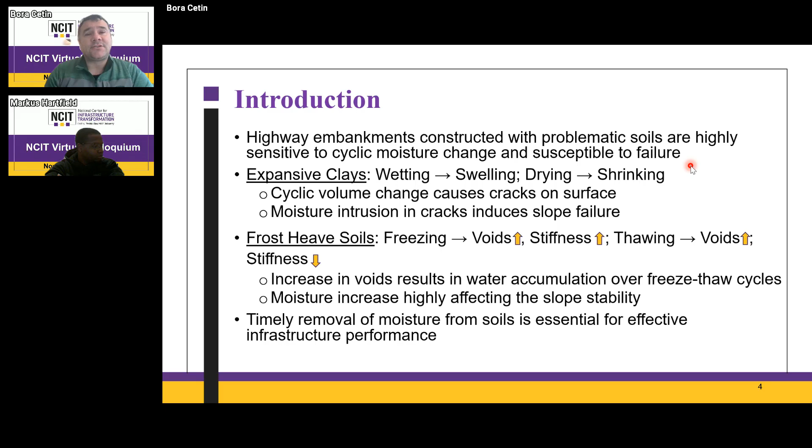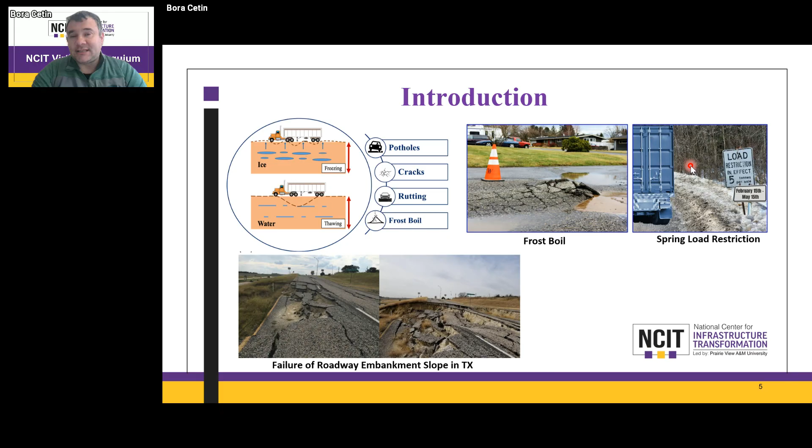The damage caused by these expansive soils and frost susceptible soils that are subjected to wetting and drying cycles and freezing and thawing cycles, the damage caused in terms of budget is 10 times higher than damage caused by hurricanes, flooding events, and even earthquakes. So these are not sudden, dramatic failures like we see in flooding events, earthquakes, hurricanes and storms, but annually the U.S. needs to deal with these two types of problems. So it's really a major problem.

What are the typical conditions for slope failures and highway embankment performance in general? You have problematic soils—two of them, as mentioned, are expansive soils and frost susceptible soils. And environmental conditions: in one case you have heavy rainfall, and in the other you have freezing and thawing cycles and water supply. Water supply is one of the major problems we deal with in geotechnical engineering. I always say if mankind ever settles or colonizes the Moon or Mars, you won't need many geotech engineers there, because there's not enough water to cause enough problematic soil issues.

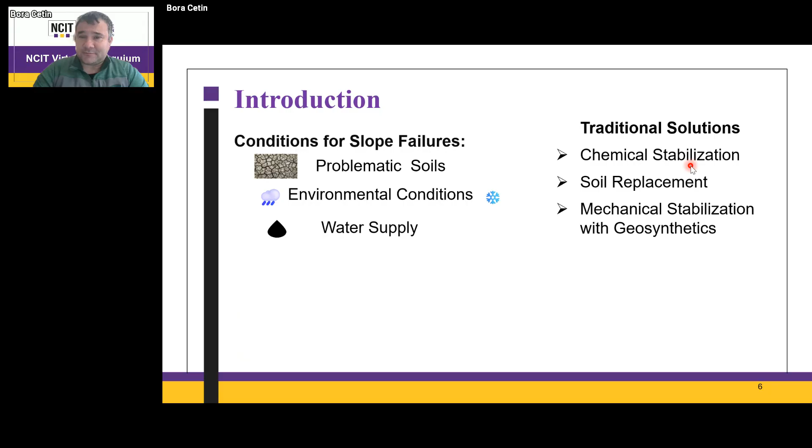The typical traditional solutions to handle these problems are chemical stabilization or replacement of soils, and mechanical stabilization, whether it's more compaction or drainage improvement, or putting standard regular geosynthetics.

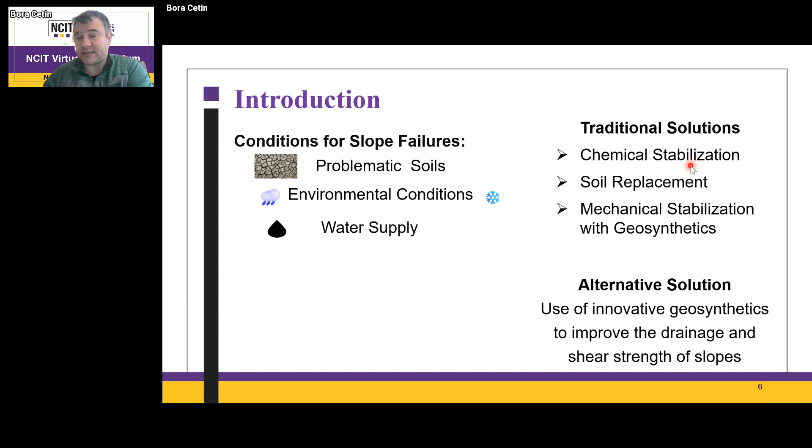However, those things have been studied, and since this is a new study, we wanted to come up with a little bit more alternative solutions, some innovative materials recently developed in the geosynthetic industry to improve the drainage of any geotechnical infrastructure, and when you improve the drainage, that would ultimately improve its mechanical properties.

One of these products, we have another product that we are testing, but I wanted to focus on the geotextile we call the wicking geotextile, which has wicking fabrics between the patterns there, as you can see the blue lines.

What these wicking fabrics do is use the differences between the relative humidities from the atmosphere and within the soil, to start moving and suck the moisture within the roadway system or soil system and remove it horizontally to the sides of the embankments or to the slopes, trying to keep the soil as dry as possible.

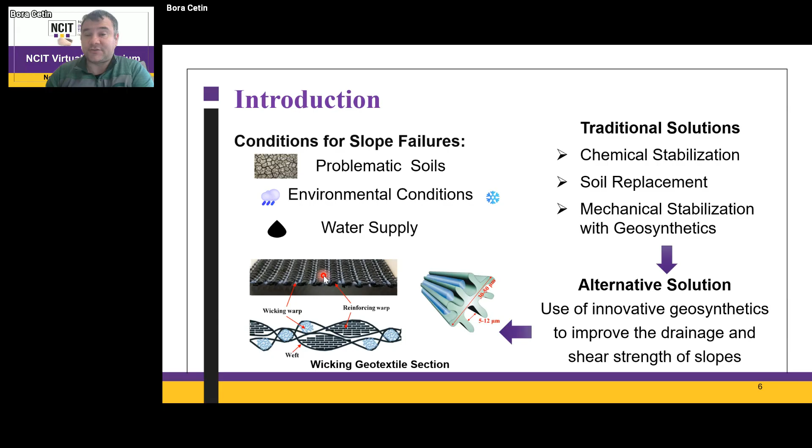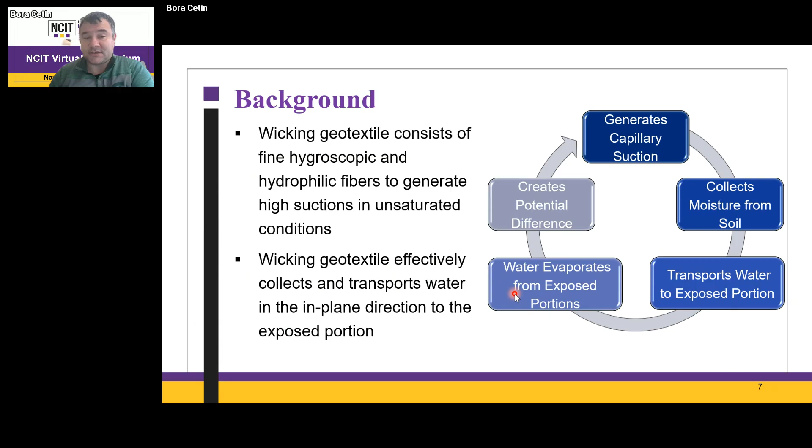To give some background, it generates capillary suction, collects that moisture from soil and transports the water to an exposed portion, where that water evaporates. Because of that potential difference, it keeps the soil drier.

So if we come to the overall objective, I won't have enough time to go into all the details, but the overall problem statement is to improve the performance of expansive soils and frost-susceptible soils by integrating this innovative geotextile, and evaluate their performance both in the lab with large-scale testing facilities, small-scale testing equipment, and also do some modeling and field testing.

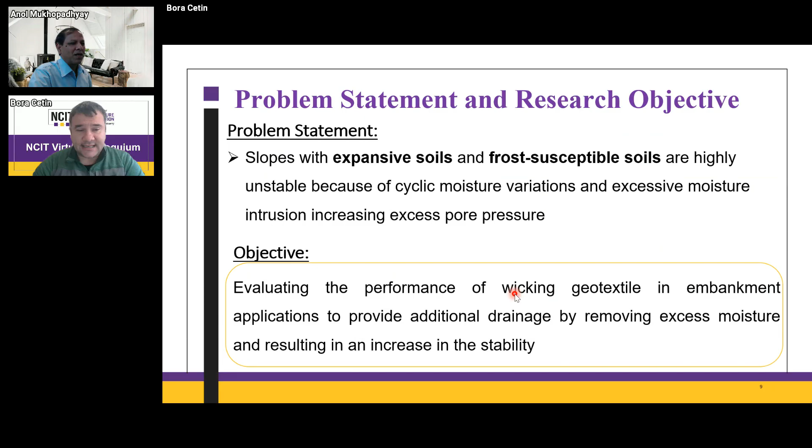We recheck to see if this geotextile is really removing the excess moisture, and whether it results in an increase in stability.

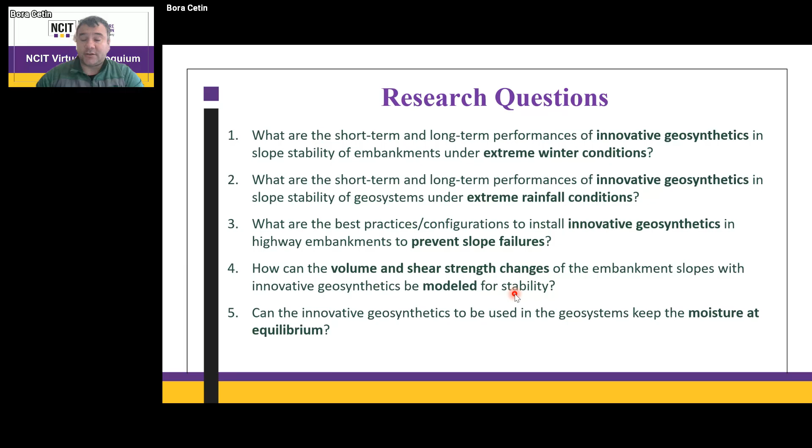So we collected two different soils, one from Minnesota, frost-susceptible silt, and one from Texas, swelling clay, as our main goal is really to improve the performance of soils in freeze-thaw conditions and expansive wetting and drying conditions for the swelling expansive clays.

And in MSU, what we mainly do is frost heave test. I'm happy to provide more information on this later on.

We prepare our specimens 6 inches in diameter, 8 inches in height, and we sometimes put the wicking geotextile in when we want to see the performance of the wicking geotextile in this frost heave test setup.

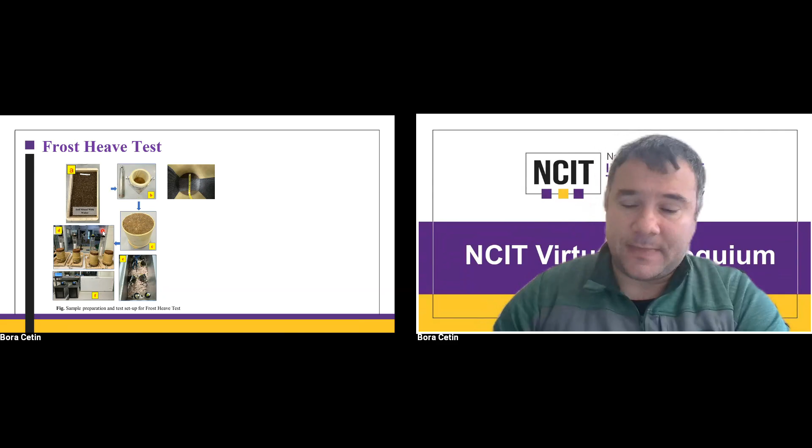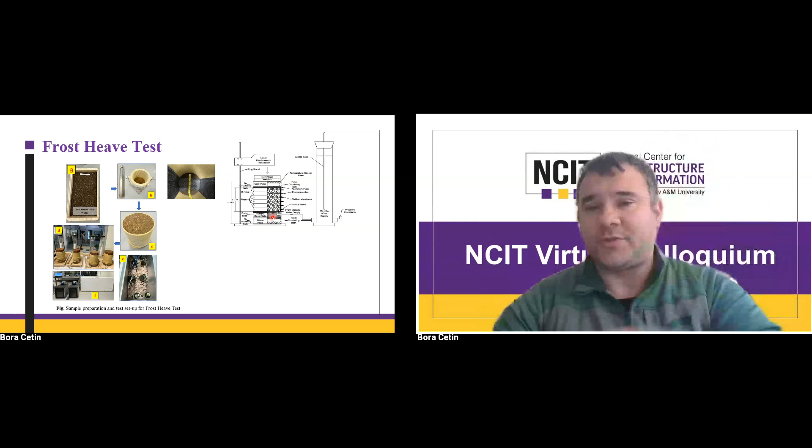We put thermocouples at every inch of the specimen and monitor it, and we have heat exchangers on the top and bottom to determine the thermal gradient that we apply to simulate the freezing and thawing of the samples.

We have a water supply simulating the groundwater table source, and that provides the water from beneath. When we start freezing from the top, that's what happens in the field.

We see how much water is being sucked in, and if you put the wicking geotextile at any level here, we also try to configure which level we need to put the wicking geotextile at, to make it more efficient to use.

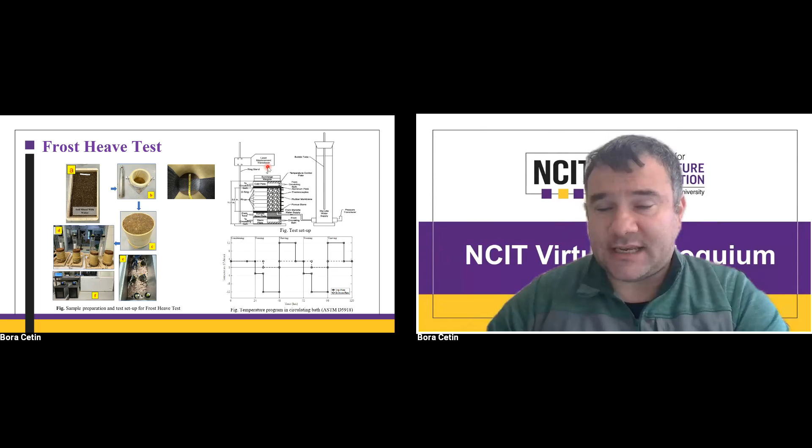You monitor how much the material heaves when you apply the freezing and thawing cycle. Here is our temperature program - during this thermal gradient and temperature scheme we apply, how much soil is heaved and how much it thaws when you warm it up from the top.

We keep the bottom plate always warm at 4 degrees Celsius, and we monitor this temperature regime, how the specimen heaves and how much it thaws. We measure displacement through lasers placed on top of each specimen.

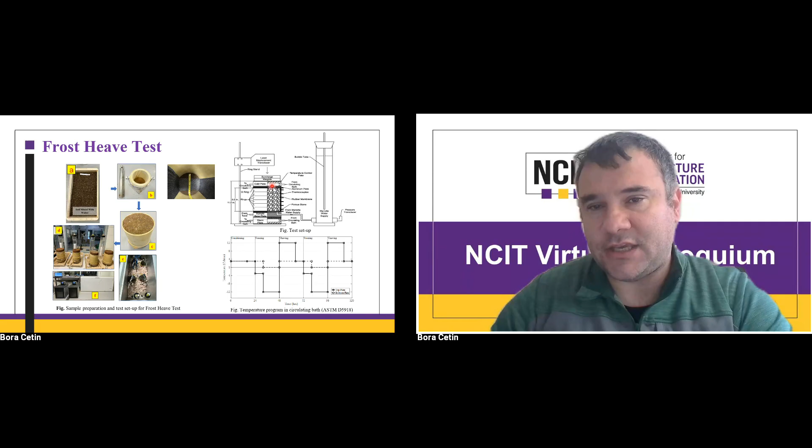And here, the red - I won't go much into detail.

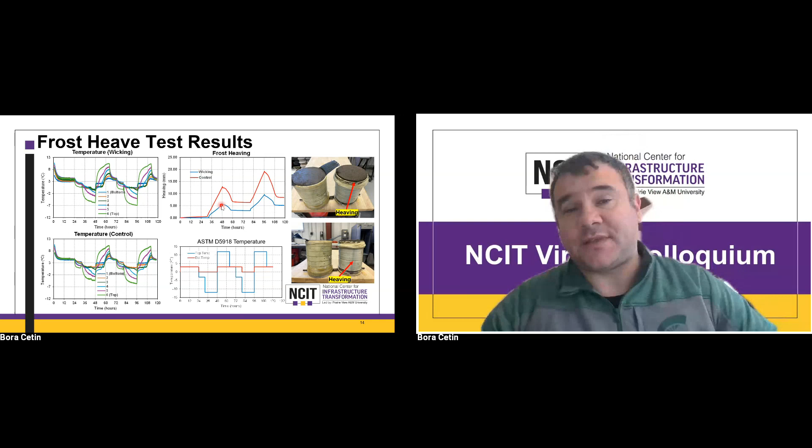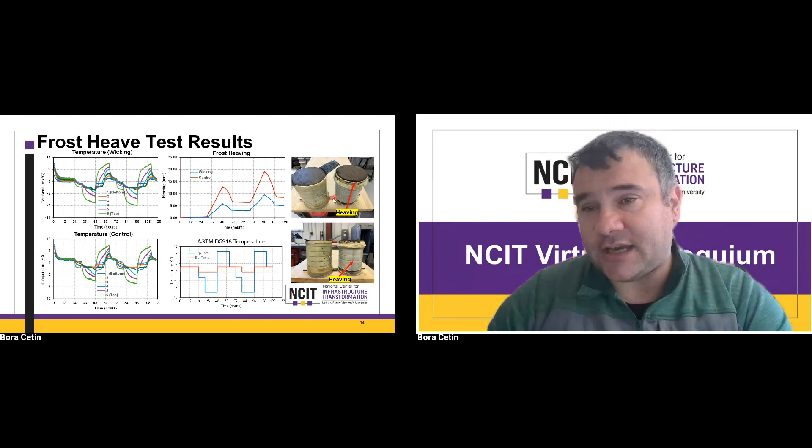Here is our temperature control per depth for each one-inch part of the specimen. The blue line shows the wicking geotextile's frost heave performance, and the red line shows the specimen without geotextile. As you can see, wicking geotextile is absolutely helping minimize frost heave and thaw settlement performance. This is one of the first results of our tests, and we're running many more tests now. We also monitor moisture regimes on each layer, so we hope to have more information at the next meeting.

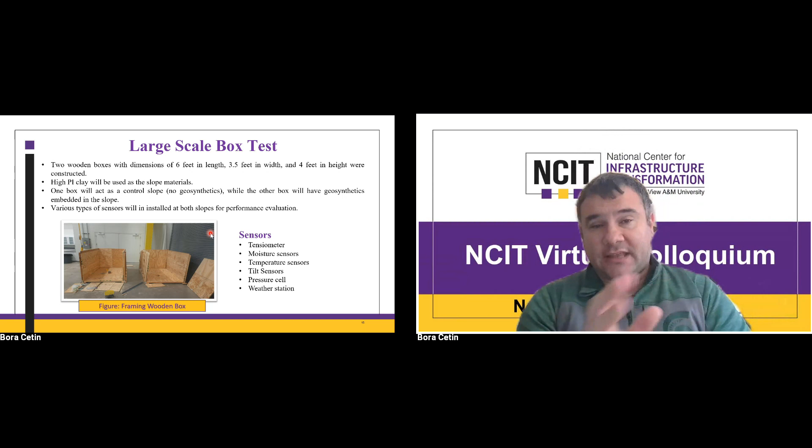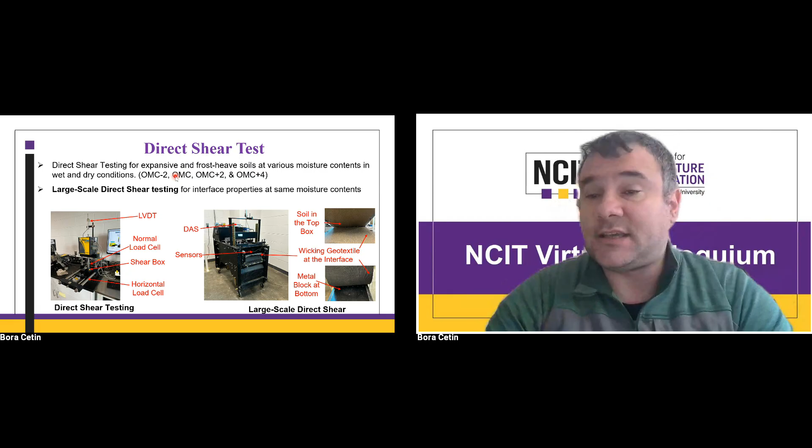Another work being done by Texas A&M and Prairie View: we're in the process of building large-scale box tests and running wetting and drying cycles, installing sensors to check how these geosynthetics would work at large scale. Arizona State and Texas A&M are doing regular and large-scale direct shear testing at different moisture contents to check the benefit of this geotextile on the performance of these slopes.

Last summer in Iowa, we built test sections on an unpaved roadway embankment and placed the wicking geotextile and non-Viking geotextile with similar material characteristics, plus a control cell. We put moisture and temperature sensors at different levels and horizontal longitudinal directions to monitor whether the wicking geotextile is really sucking moisture out of the system, as opposed to the non-wicking geotextile and control section. We're also monitoring stiffness values.

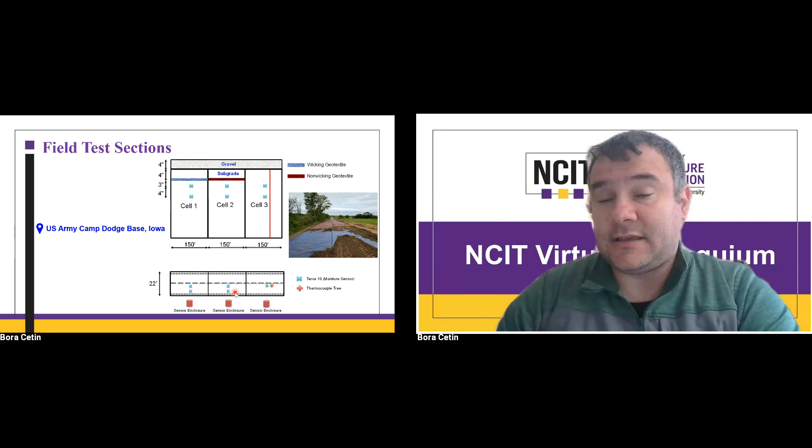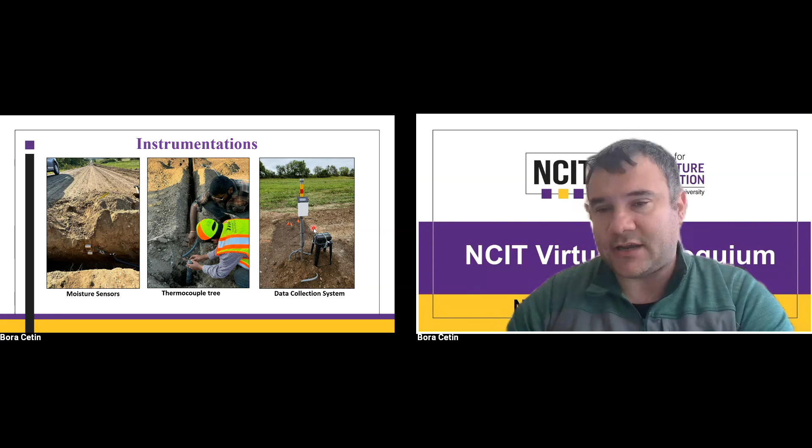Our team will be there next week to start taking stiffness and strength measurements before the winter hits. Here are some pictures of how we installed the moisture sensors, thermocouple tree, and here is our data collection system on the ditches of the embankment.

We've already started doing field application on large embankment field sites, and I think Dr. Alam will have more information on this. They've started installing sensors and monitoring the performance of test sites where they've installed just the wicking geotextile. We've also started curating our numerical modeling framework to simulate the performance seen in the lab and in the modeling programs.

Our specific focus at MSU is frost action—simulating frost action and how the wicking geotextile would perform. Future work involves getting into large-scale laboratory slope simulation and doing more numerical modeling in addition to the lab work we've been doing. I hope I didn't exceed too much. This is pretty much the overall summary of our project.

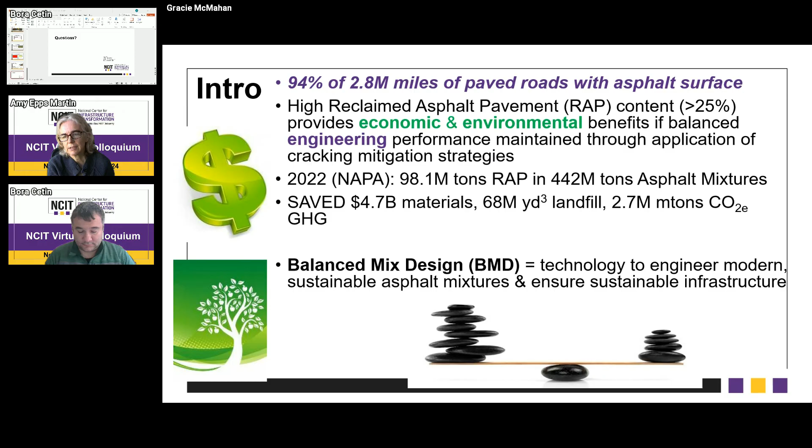But when we do this, we have to make sure we carefully balance each unique combination of materials. One of the ways we can do that is to have mixture performance tests in a balanced mix design system, which is the new paradigm being introduced across the country to engineer these modern sustainable asphalt mixtures and ensure a sustainable infrastructure.

So this project is a combination project between New Jersey at Rutgers and TTI in Texas, and each state is doing pretty significantly different things. Just as background, New Jersey adopted balanced mix design for high RAP in 2010, so almost 14 years ago. They characterize mixtures with repeated loading tests - I'll show you a repeated loading test - the overlay tester and the asphalt pavement analyzer, to look at cracking resistance and rutting resistance. They have 5 field sections that this project is monitoring and taking cores on, determining how those mixture properties evolve with time.

In 2024, they started adopting a monotonic, more practical test that might be utilized during production of these high RAP mixtures. That's the ideal cracking test and the high temperature indirect tension test. The idea is to make sure that what's being produced and put down in the field still has the balance of cracking and rutting resistance.

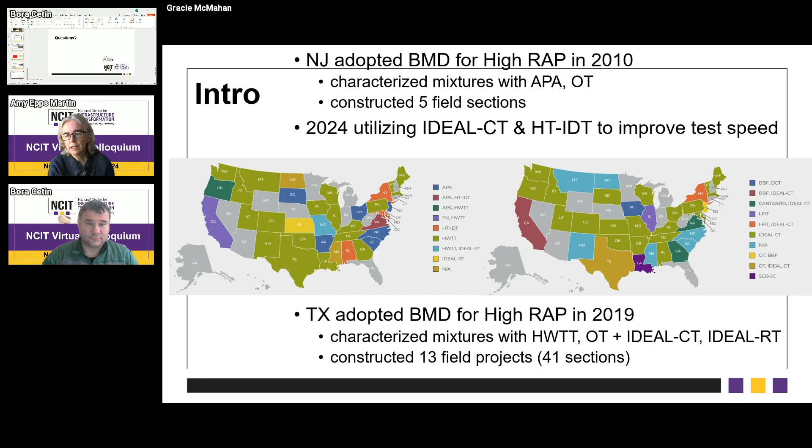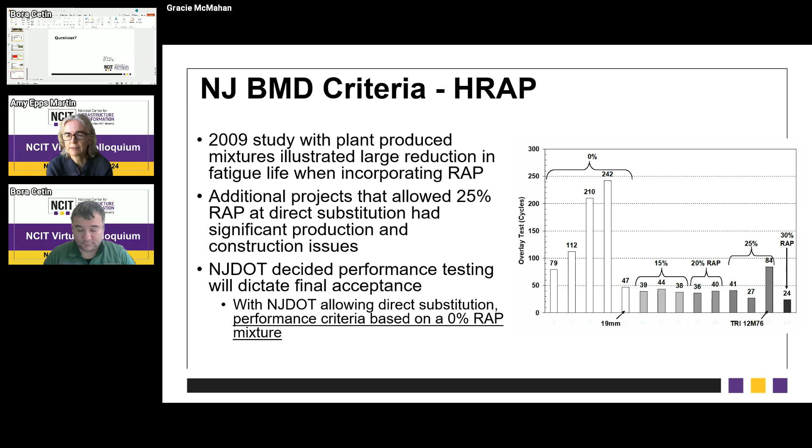They also have a few other additional design and production requirements. They have higher VMA to try to get more binder into the mixture, because not all of the reclaimed asphalt binder is going to be available. Some of it's going to be stuck to the black rock and make a black rock in your mixture.

In the New Jersey part of the project, the supplier or contractor can utilize different cracking strategies, including warm mix asphalt additives, recycling agents, and changes or substitute binder grades. They can do all kinds of different things to offset the effects of the stiff, aged RAP materials being added at higher and higher contents, as long as they meet these cracking and rutting criteria.

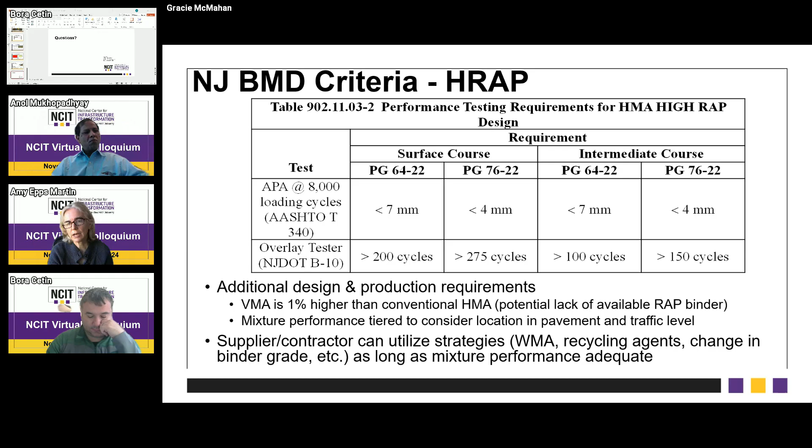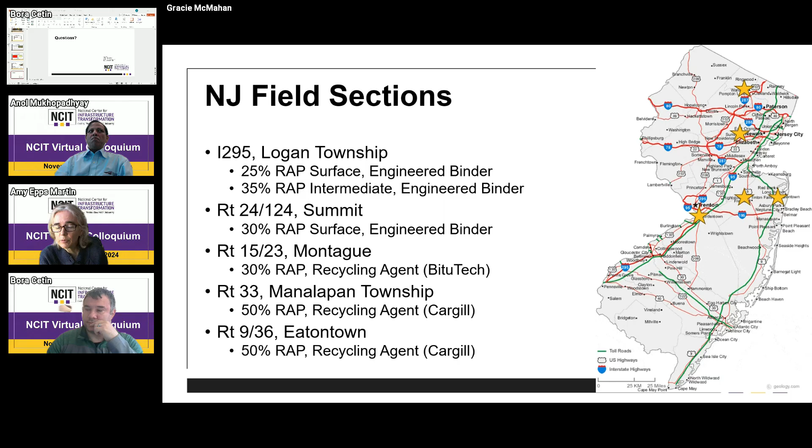So just to step through a little bit, they have 5 field sections that are a number of years old now, across the state of New Jersey—you can see those with the gold stars. They have relatively high RAP contents, all the way from 25% at the surface to 50%. Some of them have recycling agents, some of them don't, as a way to mitigate that stiff, brittle material.

On all of these they are looking at a combined surface distress index. They monitor the surface distresses: rutting, cracking, all types of cracking, non-load associated, load associated, and other distresses. They come up with a weighted single value, a normalized value called surface distress index, that goes from 5 for a new pavement all the way down to 0. When it hits 2.4, that's when rehab would be considered. So that gives you an idea of how they're monitoring the distress.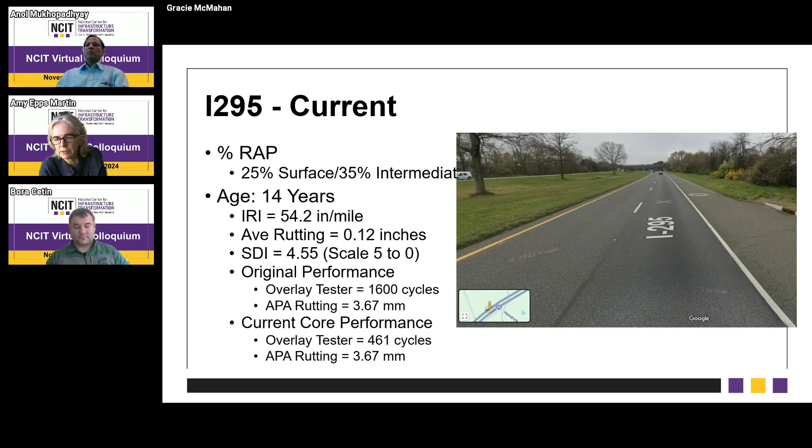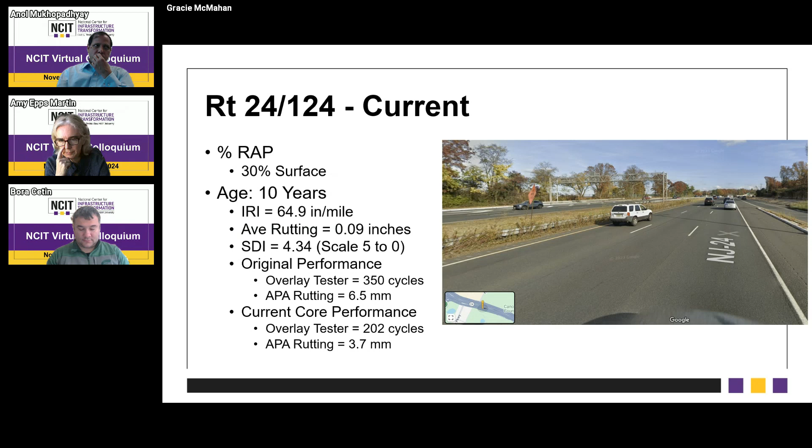Going to the next youngest of those 5 sections, this is one after 10 years with a higher RAP content at the surface. Again, the original cracking performance was 350 cycles, and it's down now to 202 cycles, but that's still very good after 10 years. The rutting is still very low, and the surface distress index is also still very high, at 4.34. Also, you see the International Roughness Index—that's an indication of ride quality—also being monitored, and anything less than 95 is still in very good condition.

There's another project with a relatively high RAP content of 30% at 10 years. You can see here that the overlay tester results have dropped below the thresholds, but still it's a 10-year-old project. The surface distress index is still not indicating anywhere close to 2.4 for any rehab to be done.

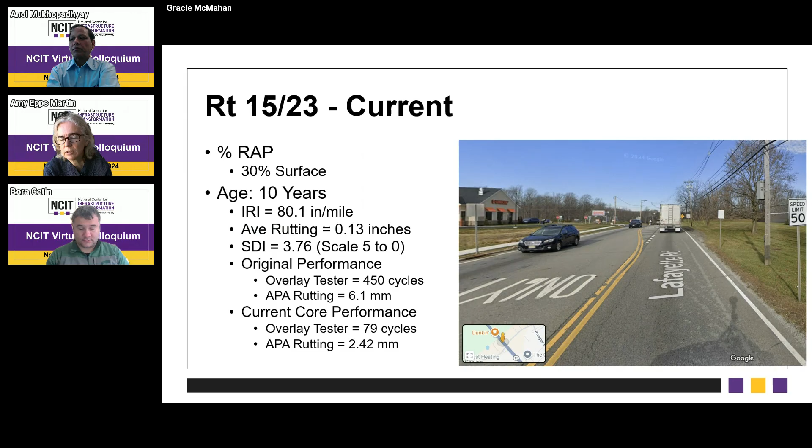The next one has been out there about 6 years, and it is still showing very good cracking performance, with very little or minimal rutting depths on the cores themselves. The SDI is still very high. The IRI is just dropping, near the threshold between good and acceptable, but still very good.

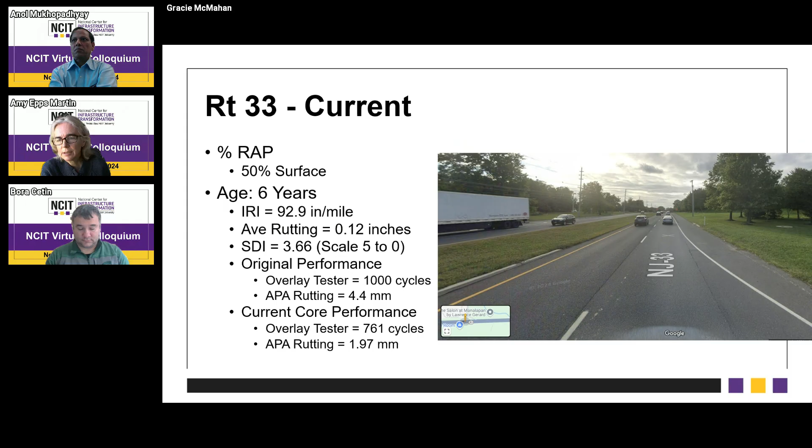The last one has also been out there about 6 years. You can see, again, very good cracking resistance, even after 6 years on the cores, minimal rutting—same story—high surface distress index, and good IRI.

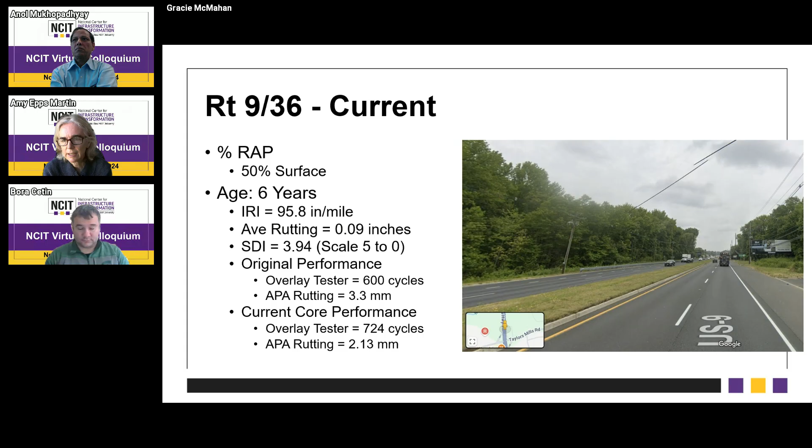Overall, they're happy with their implementation of mixture performance testing with a BMD type system for rutting and cracking performance. They're currently doing an evaluation trying to look at what's making these 5 sections perform so well after 6 to 14 years in service. They've already completed testing of the cores—you saw the results—and they're doing some analysis on the extracted and recovered binder and the volumetrics that show you how much binder you may have in your mixture.

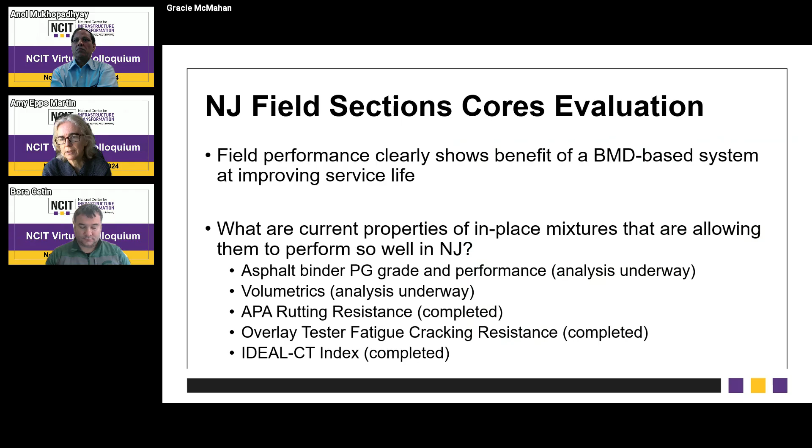So switching to the Texas effort, we basically have taken some of the results and added to them for the TxDOT BMD effort.

In Texas, we're doing repeated load testing. You see the Hamburg wheel track testing at the top, and the IDEAL RT, which is the simpler test, down on the bottom right. The thresholds shown there are in the current BMD spec, and they're based on the PG high temperature grade of the binder, similar to what you saw for New Jersey.

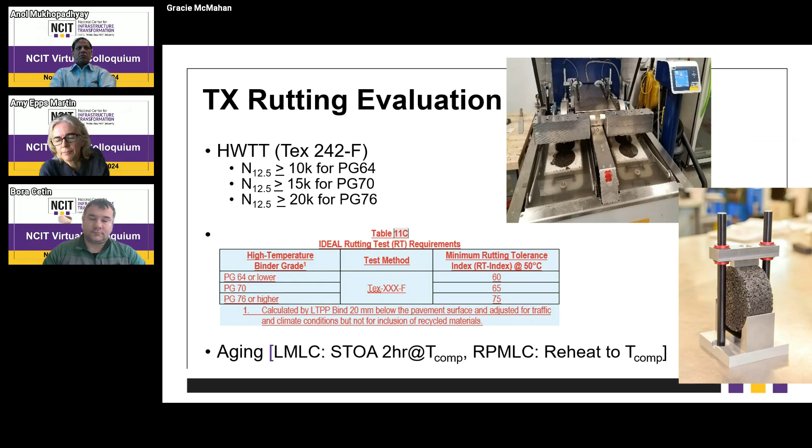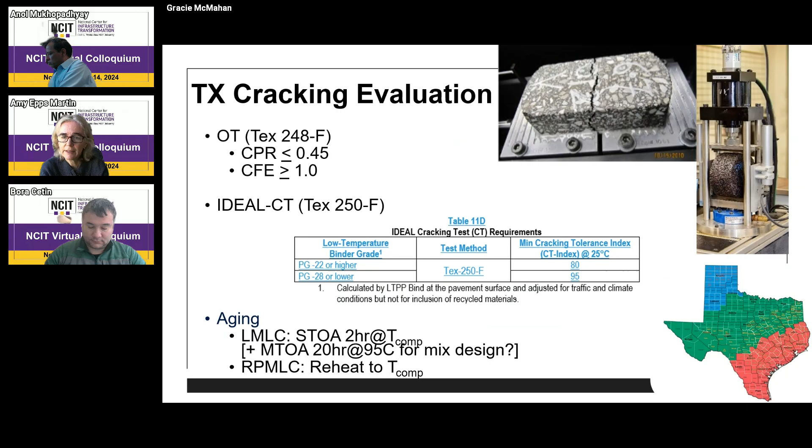For cracking, we're also doing the repeated load overlay tester, which is the same test being done in New Jersey, and then the IDEAL-CT, which New Jersey is also doing, on the right-hand side. We've proposed that the threshold should be tied, in this case, to the PG low temperature grade of the binder.

The TxDOT BMD effort has 13 field projects scattered across the state, so again different climates, different materials, different contractors involved. This effort is looking at data from nine of those projects, plus some additional projects that have just been done in the lab.

So what are these different cracking mitigation strategies? I mentioned some of them in the New Jersey part of the presentation, but basically what can we change about the recipe for our hot mix asphalt? We can change the materials, and that has to do with the quality of the materials.

So we can change the binder source. We can make it a softer binder, either at the high temperature end, the low temperature end, or both. We can add a polymer modified asphalt, or we can simply keep the same PG performance grade but change the binder source. We can also include an additive like a recycling agent or a warm mix additive. And something that's more difficult to do is to change the RAP source and the aggregate source. Usually that's tied to the location, the specific contractor, and the availability of materials locally.

The other thing we can do is change the recipe, right? How much, the proportions of those materials. A big thing people do a lot is increase the effective binder, which means the binder that's not absorbed into the aggregate, but available for binding and coating our aggregate particles together. So a lot of times the aggregate gradation is adjusted. We can also increase any additive doses.

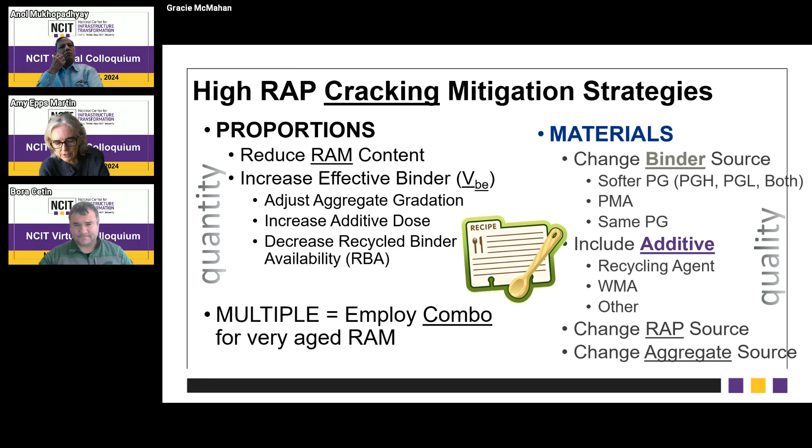So we looked at a bunch of different strategies: proportion changes, material changes, additives, and we compared all of them back to a control. The control is usually a typical RAP content, like 20% or below. We compared their cracking resistance and their rutting resistance. This just gives you a snapshot of the different sections we looked at, some in the lab, some in the field, and which different strategies we were able to look at.

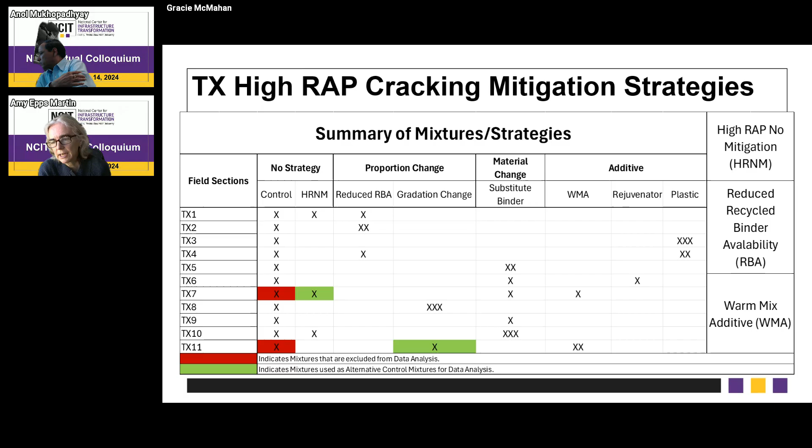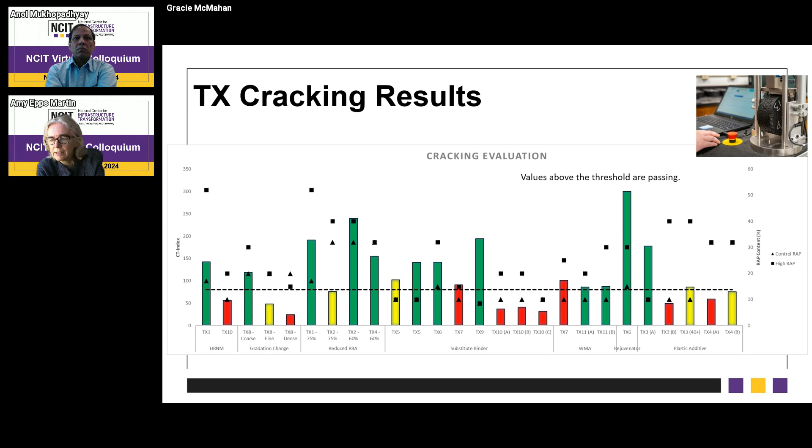But as long as it's meeting that dash line, which is the threshold currently in Texas, then we're still okay. The last thing we have to worry about when we apply these strategies is not having a rutting problem. So make sure you don't sacrifice rutting performance—at least be as good as the control, shown in yellow, or better than the control, shown in green. In some cases, some strategies do create a rutting problem.

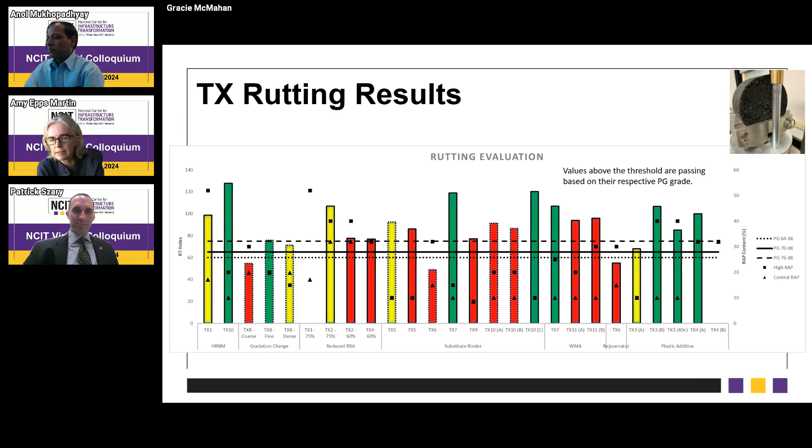Looking at all those strategies together, we note that some mixtures might not require a strategy at all. Reduced recycled binder availability can be effective across a variety of RAP contents, and gradation change is also important to increase effective binder content. Substitute binders are better for moderate increases in RAP content, while rejuvenators work better with higher RAP contents. We've also looked at plastics, and they can be effective at higher doses across different RAP binder contents.

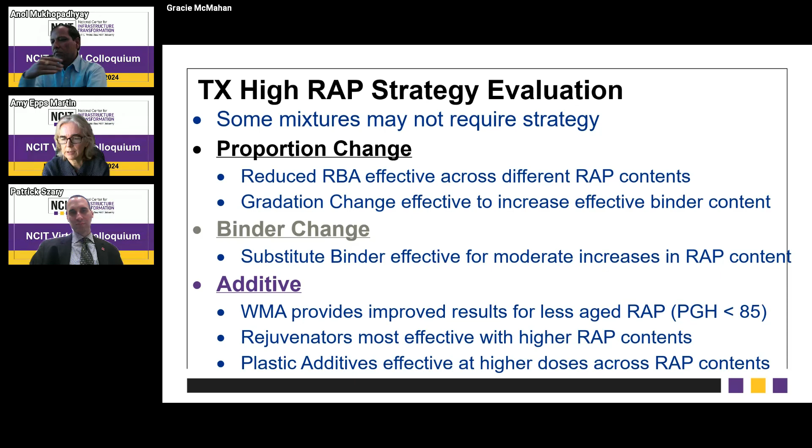So the next steps: New Jersey is completing volumetrics and binder characterization and analysis to figure out what's giving them that good extended field performance. Texas is working on developing a guide for these high RAP strategies—identifying in which cases we should try the different strategies. We're also going to explore a relative cost analysis.

I also want to mention that this project ties in with a lot of different efforts nationally through the Transportation Research Board, through a consortium for asphalt pavement research and implementation, through a BMD implementation working group, and through many current and ongoing NCHRP projects and FHWA efforts. So it's all tied together, and we're happy we're able to do this project. Thank you.

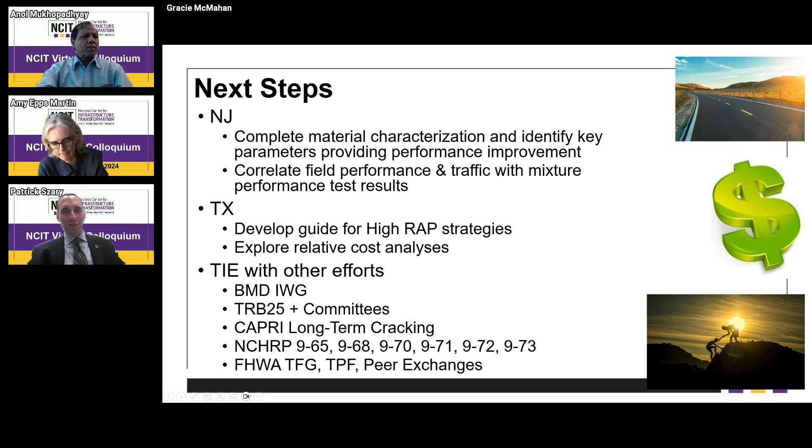Great, thank you Dr. Epps Martin. And you win the award for saying New Jersey the most amount of times in any presentation today. So that's awesome, thank you. Working with Dr. Tom Bennert here at Rutgers, it's really great to see that collaboration. So thank you. We're going to hold questions until the end if there's time. If there are any questions while they're fresh in your mind, please use the chat Q&A feature to drop the questions in the Q&A box.

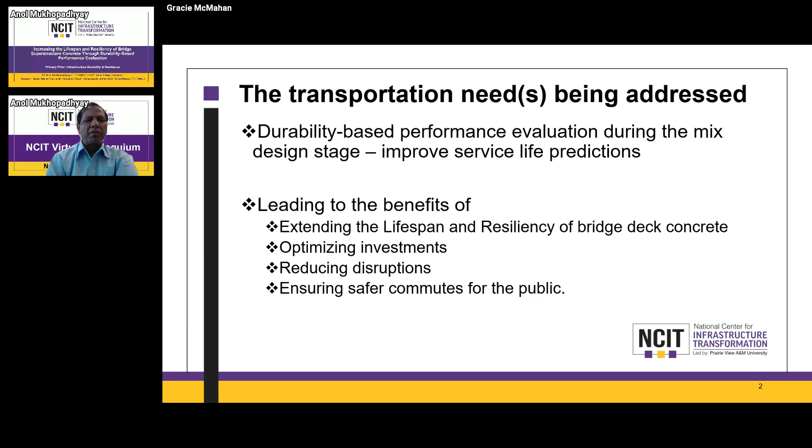One factor is the live load as well as the environmental, which is primarily corrosion of the concrete. You see the concrete corrode, and it ultimately leads to crack development, delamination, and failure. So if we have better control on prediction of concrete conditions over time, we can take a better decision for the right selection of rehabilitation methods and extend the lifespan and save repair costs.

That's the big deal. But the problem is at this time, we really don't have better prediction models to assess the damages over time.

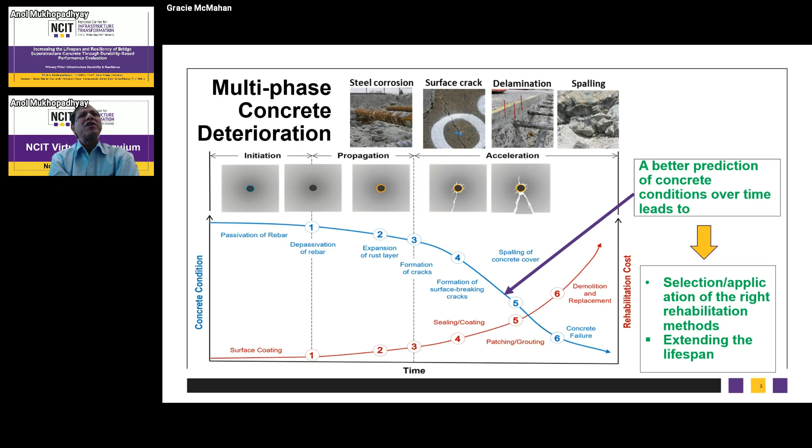Then at the structural level, Rutgers is leading that. They did accelerated concrete bridge deck testing in BEAST and developed the deterioration curve, helping to generate the deterioration curve due to live loading only through NDT evaluation, and established a relationship between the ADTT and the deck deterioration. That relationship we use to predict the deck deterioration due to ADTT live load in item 2. For item 3, they did a significant amount of NDT evaluation in a couple of bridges over a duration of 4 to 5 years, and developed a damage curve over time due to both live load and environment.

Number 4 is that we compare the NDT evaluation and the bridge deck deterioration due to live load, and try to apply an environmental factor to give a complete picture. However, their prediction is primarily structural; material is not included. Ours is material; the structural live load deterioration is not included.

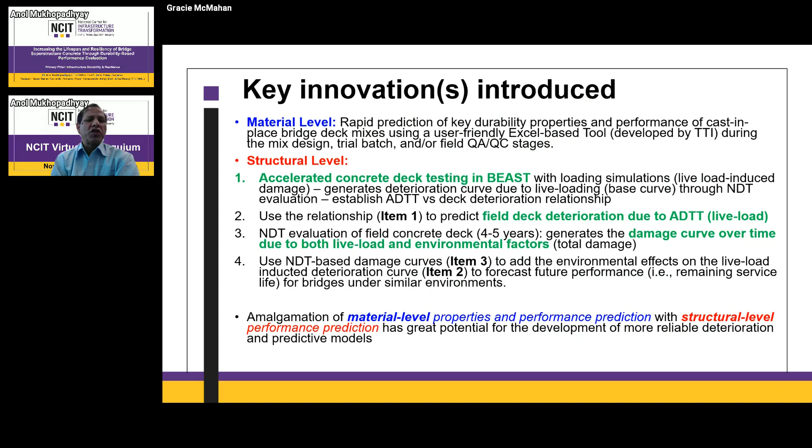This is the TTI model that we developed. We developed an Excel-based tool that predicts 4 durability aspects. Number 1 is alkali silica reaction in concrete. Number 2 is shrinkage-based cracking potential. Number 3 is chloride durability, time of rebar corrosion, and probability of failure. And number 4 is freeze-thaw durability.

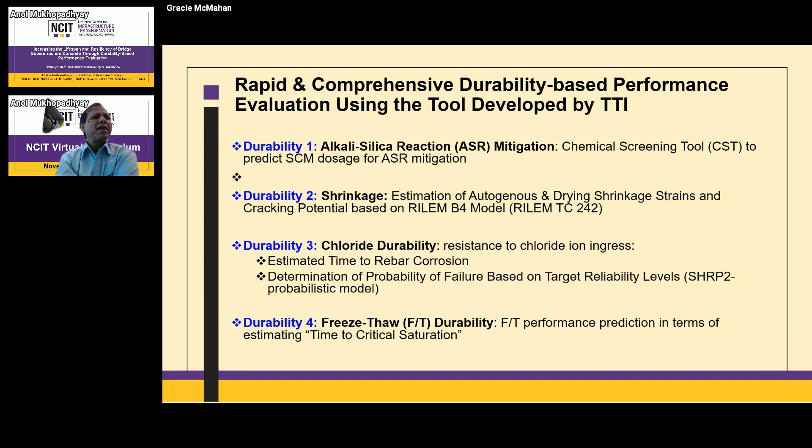This is already developed, just to give an idea: this Excel-based tool takes input of material composition, mix design information, and resistivity measurement of the concrete mix. The tool uses those inputs along with some other intermediate level inputs, with built-in models, and calculates based on this model and input to predict 4 major durability aspects of the concrete.

One is the ASR prediction, showing how much supplementary cementitious material you need to mitigate ASR. Then the amount of autogenous and drying shrinkage and cracking potential of the mix. Then time of corrosion initiation or probability of failure of that mix, and the time to critical saturation as a measure of freeze-thaw durability.

These are done during the mix design stage. So if there is any deficiency in the mix, you run the tool and give the input, and if you see any deficiency, you still have room to fix the problem before placing the concrete in the field.

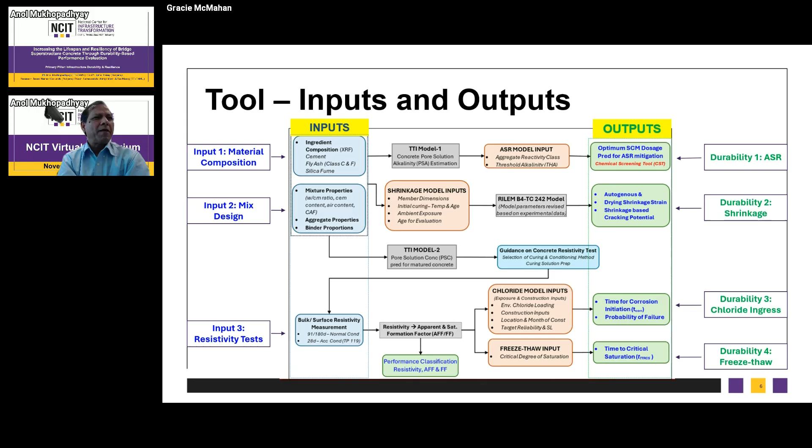Our job is to reproduce the mix from the BEAST facility at Rutgers. We reproduced the mix and did the sample casting. Several tests are underway, like autogenous shrinkage test, chloride test, freeze-thaw durability, bulk resistivity, surface resistivity, alkali silica reaction, and petrography. So mix design finalization and sample casting is done, and all the lab tests are in good progress.

And of course, we are going to identify some bridge decks that contain SCM like fly ash.

The versatility of the material level tool that we developed is that it can do rapid determination of lab-based properties. Without doing long-term testing, we should be able to predict those properties. But of course, it needs a tremendous amount of validation.

That's what we are going to do in this project. But in the future, you won't need those long-term tests every time. You just predict the properties and also predict the 4 durability aspects that I mentioned in the previous slide during mix design time.

So these tools can be applied during the performance-based approach in mix design, at trial batch, or sometimes in the field when they place the mix, the field truck can use that mix also. The purpose is to identify whether it is really a good mix necessary for a particular location. If not, there is still rectification needed, so that if you place a good mix in the real world, it performs long term, durable, safer infrastructure, and minimizes repair cost.

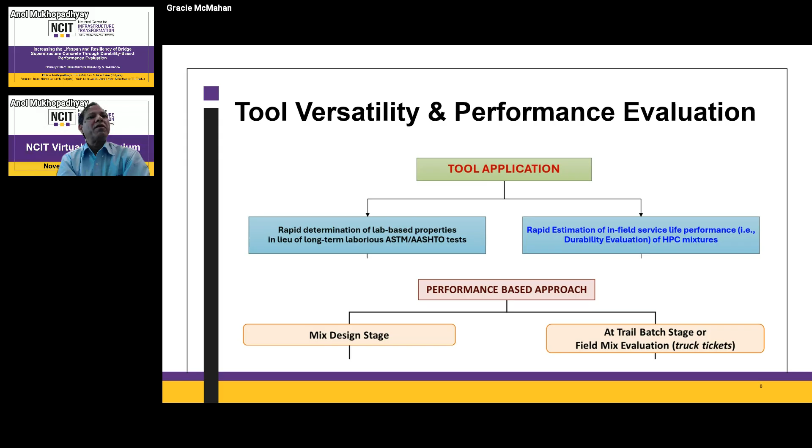Next slide, please. This is the BEAST slide, the Bridge Evaluation and Accelerated Structural Testing. This is primarily designed to simulate accelerated conditions and evaluate the bridge deck. It is a chamber, you see the big chamber. Next slide, please.

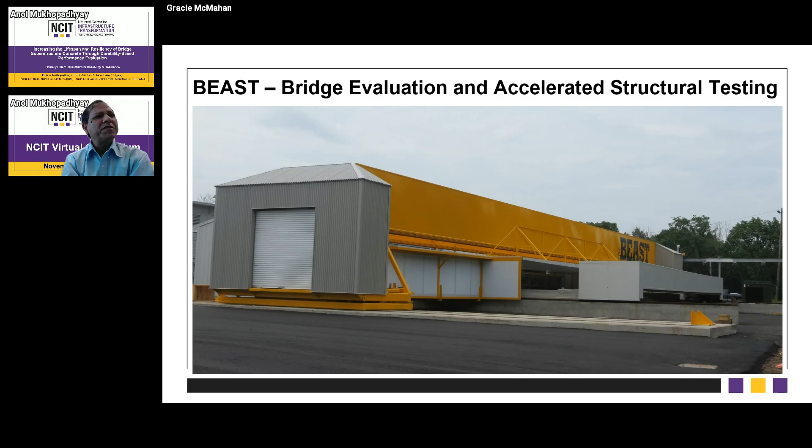Okay, so this is the BEAST. They placed a 50 foot by 28 foot, 5 foot thick deck inside this environmental chamber, and it simulates the load, which is around 17,000 cycles per day. It's a very accelerated load testing. They apply brine salt and also freeze-thaw cycles, so under simulated conditions, trying to understand the behavior of the deck within a small period of time, like within 2 years.

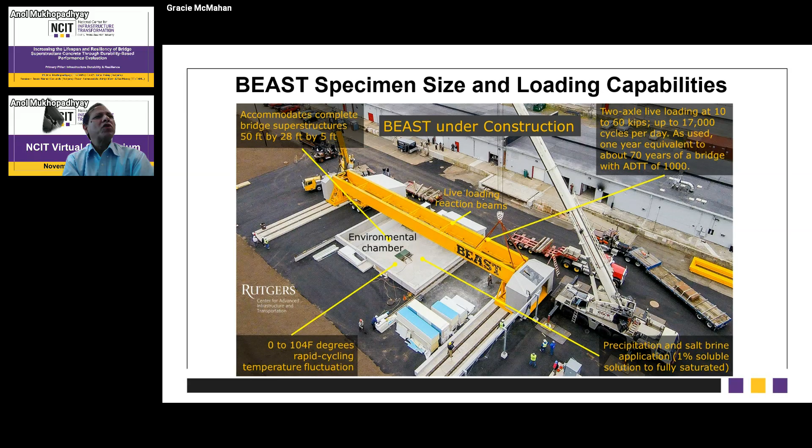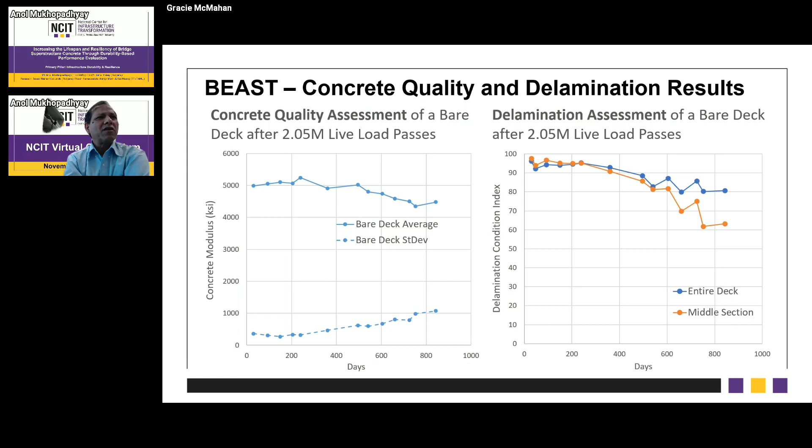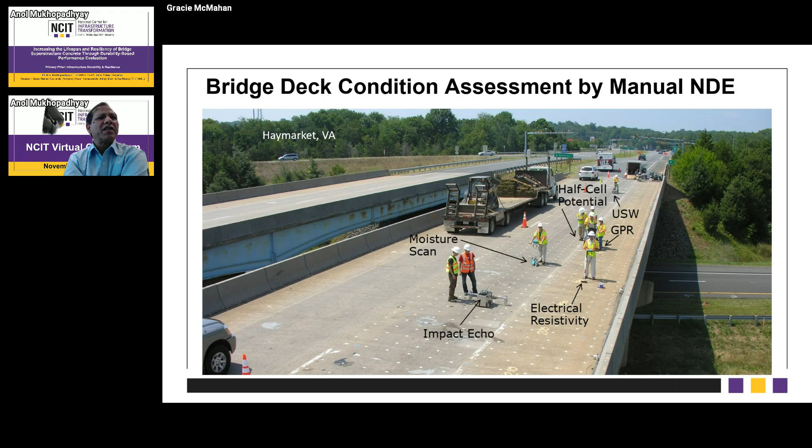Go to the next. Okay, now they went to the field. This is called Virginia Haymarket Bridge, where they did manual NDE, non-destructive test evaluation: half cell potential, USW ultrasonic wave, GPR, electrical resistivity, impact echo, and moisture scan. Go to the next, please.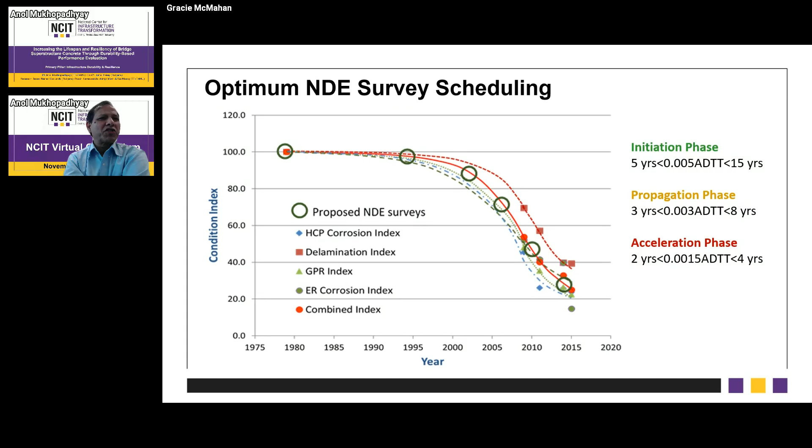The one important thing here is, if you go to a bridge and it is in an acceleration phase, your frequency to go to the field should be more than 2 years, less than 4 years. So if you go to the field and do a real NDT evaluation and damage curve over time, a meaningful curve can be generated in a minimum of 2 to 3 years. Our project is 2 years, so it is time bound, and it's really difficult to get a complete picture of the deterioration curve within this small 2 year project. Go to the next, please.

This is a very interesting slide, probably the most important one here. You see the blue curve, the BEAST curve. BEAST did a 2-year study in accelerated conditions. Now they try to predict under field conditions for a particular bridge like Haymarket Bridge, applying the ADT values, and they try to predict the load-only deterioration curve called BEAST, the blue curve.

RT18 bridge, where the BEAST curve is compared with the field curve. That field curve correction was actually incorporated without doing the NDT evaluation of that particular bridge. So that is the beauty of it. That means on the left side, the 2 curves, like for RT18, can be generated without going to the field, due to the advantage of the BEAST facilities.

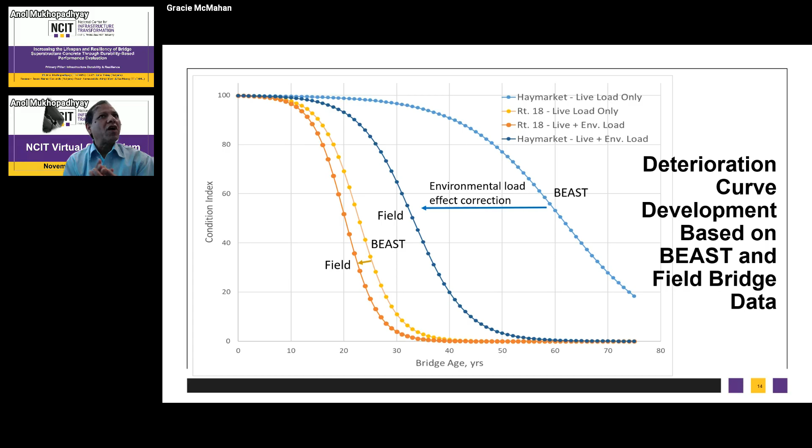So this kind of curve can be incorporated in our evaluation. Go to the next. So what is the deliverable product that the end user is going to use? It is a combination of the material work TTI is doing and structural work Rutgers is doing.

With the materials, we can use our tool to predict and make sure a good mix is applied in the field, a durable, good mix. We can ensure that, but at this time our capability is only that; we don't have the structural evaluation. Now we can add the modeling capability of Rutgers and incorporate it in a combined format, giving aspect one and aspect two both. If engineers have these two pieces of information together, how are they going to use this for new construction as well as existing decks?

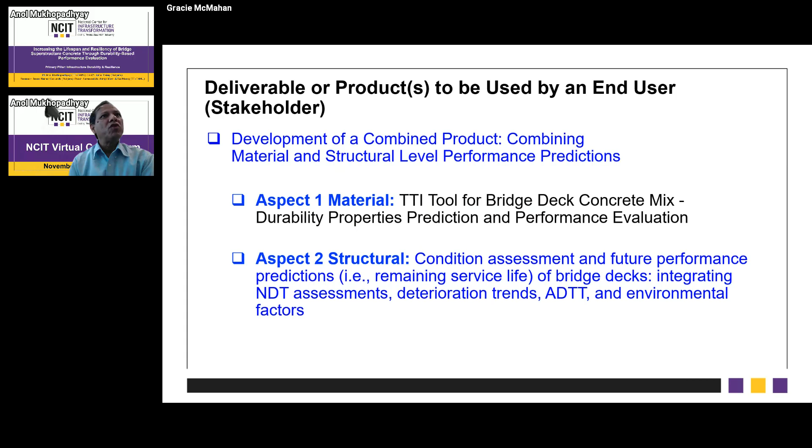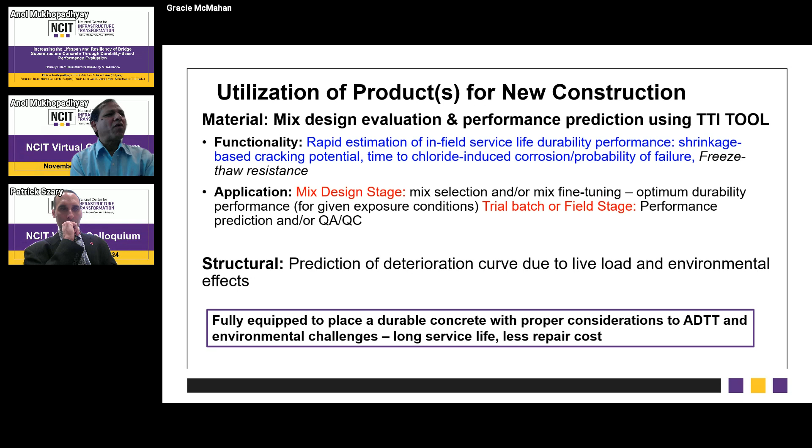Can you go to the next? So for new construction, we are doing the material level work TTI developed. We can do rapid estimation of in-field service life and durability performance in terms of shrinkage-based cracking potential, time to chloride-induced corrosion, probability of failure, and freeze-thaw durability during the mix design or trial batch stage. Structural work is going to perform prediction of the deterioration curve due to live load and environmental effects. That means you'll be fully equipped to place durable concrete with proper consideration to ADT and environmental challenges, leading to long service life and less repair cost.

Next. And for the existing deck, what we can generate is a combined approach of material and structural models, facilitating prediction of the damage curve in a very reliable manner. One thing we can introduce is that our TTI material prediction is expected to be useful to validate the curve shifting due to environmental effects on the left side. That's a good thing we can introduce, which is currently not there. And determination of the right time to apply sealer coating materials, patching, or grouting to extend the life and avoid or delay the huge cost associated with demolition and replacement.

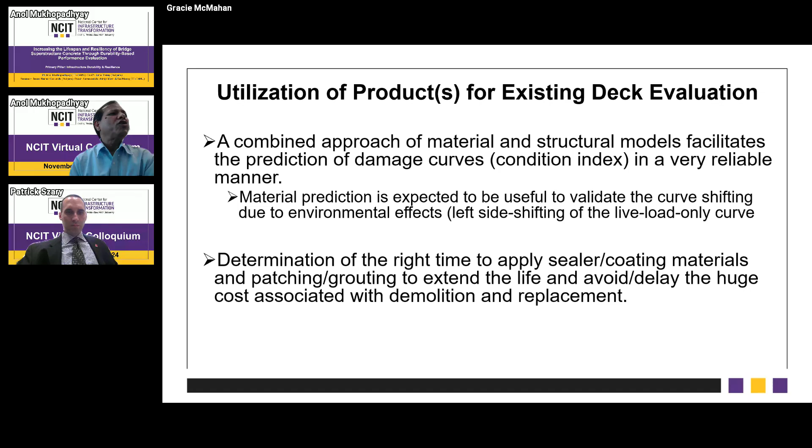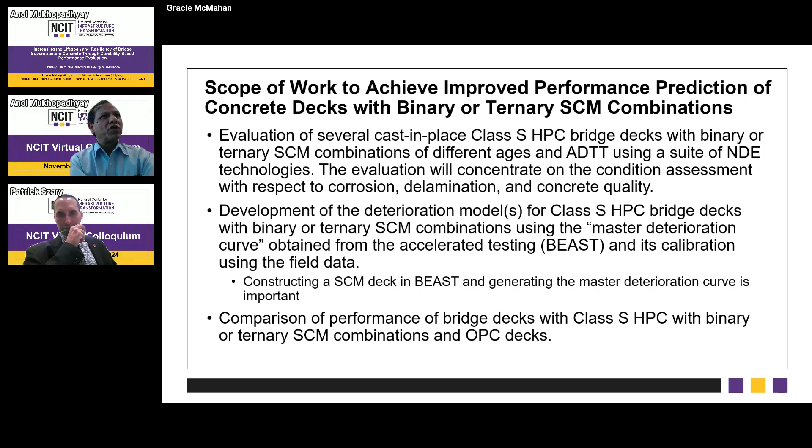Now the next step is we need to identify bridges with SCM. All the discussion so far was based on OPC, 100%. Now in Texas and other places, bridges contain SCM, so we need to select a bunch of bridges and do the evaluation. Rutgers is going to do that, and we'll take care of the SCM bridges.

Next slide, this is the last slide. The broader impact is that TTI is doing the material level and Rutgers is doing the structural level. If we combine them together, I think we can generate a very powerful tool, model, or predictive capability to reliably predict the deterioration curve, which helps selection of suitable maintenance strategy, saves resources by extending service life during the design stage, and ultimately helps safer commutes for the public. Thank you.

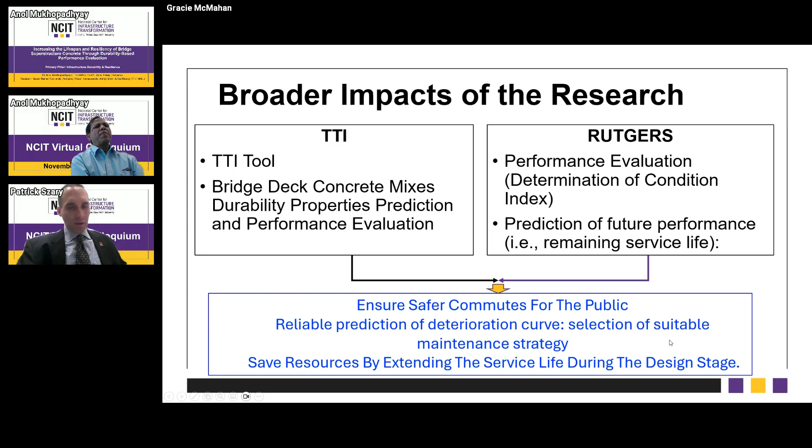Thank you, Anol, really appreciate the presentation. And of course, Dr. Epps Martin, appreciate all the references to Rutgers and New Jersey. You come in second, I think Amy beat you on the New Jersey references. But thank you to all of our speakers. We have about a minute or two for questions.

I saw one question come in on the Q&A for Bora, asking about which placements of geosynthetics you would suggest for proper drainage following a large-scale slope failure, based on your lit review. Hey, thank you, Robbie. Thank you, Pat.

We haven't gotten to the large-scale implementation test yet, but so far the literature review and some of our field experience suggest that with this type of wicking geotextile, you'd want it to be daylighted, you excavate it and put the geotextile properly wherever it failed. When reconstructing it, you rebuild it with a 1 to 2% slope and make sure it's daylighted. Those wicking fabrics should be longitudinal to the drainage direction so they can carry water out to the sides.